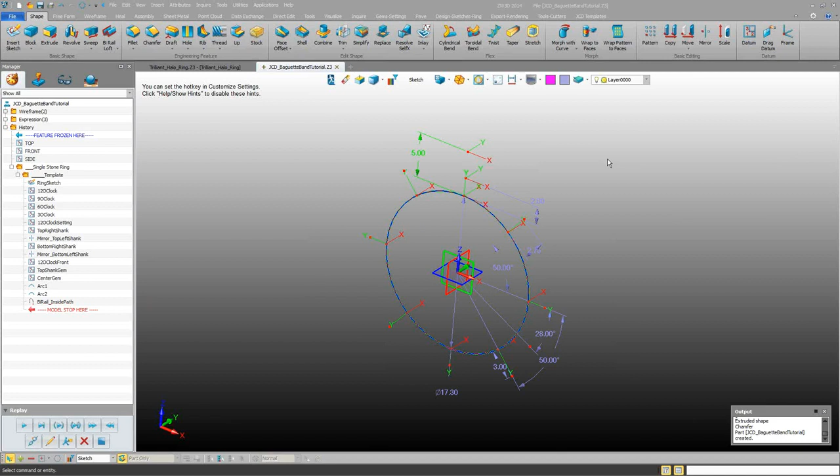All right, basic band, basic eternity band. Design sketches ring. The fellow that needs help is looking for a comfort fit and just a basic square shank like this with a comfort fit.

So since it's an eternity and it's the same thickness all the way around, we only need it at the top. I'm going to right-click on the sketch and edit.

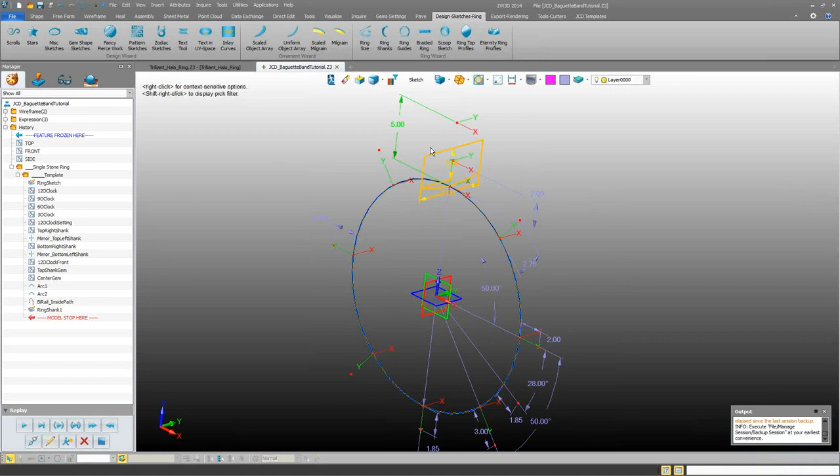Now, this part here, you come in and you manipulate it the way you like. He would like a 3 millimeter wide baguette, so I'm going to make this 4 millimeters, so we have a little bit more than a half on each side.

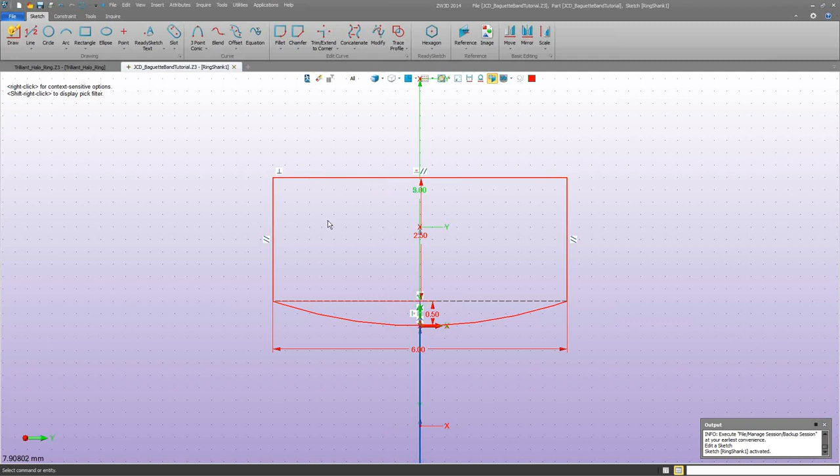We'll build it and then pull the surface over the top just a little bit. So, right-click, modify, 4 millimeters.

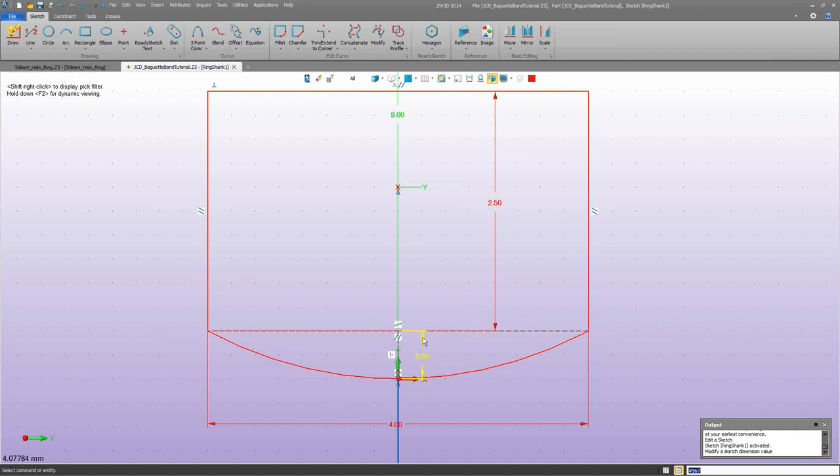Whatever your height is, when you have comfort fits, zoom in and pay attention to this bottom dimension. This is all a part of your height from the finger. So we got 2.5 plus a half, so we're at 3 millimeters high, which is pretty thick.

Okay, I'm going to knock this down to 1.5. Okay, so now we're at a total of 2 thick.

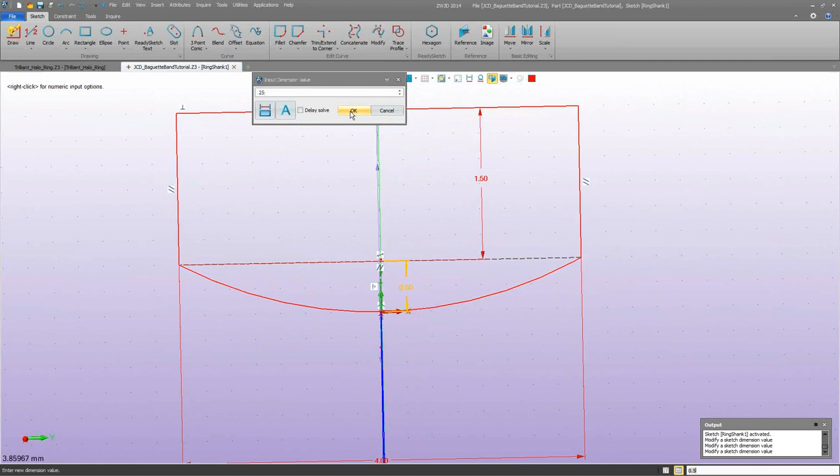If your comfort fit's too intense, you want to make it a little bit harder, right-click, modify it, knock it down to a quarter. Again, you can build rough in the beginning, crude, and then come in and fine-tune it afterwards.

I'm going to leave it at 2 millimeters by 4. I'm going to right-click, exit the sketch, shape, revolve. I'm going to set up my axis right away.

It's the y-axis, revolve type. It's really not too important if it's two-sided or one-sided. One-sided, you just don't have to put anything in here. Since it's closed, I like to have no end caps right here.

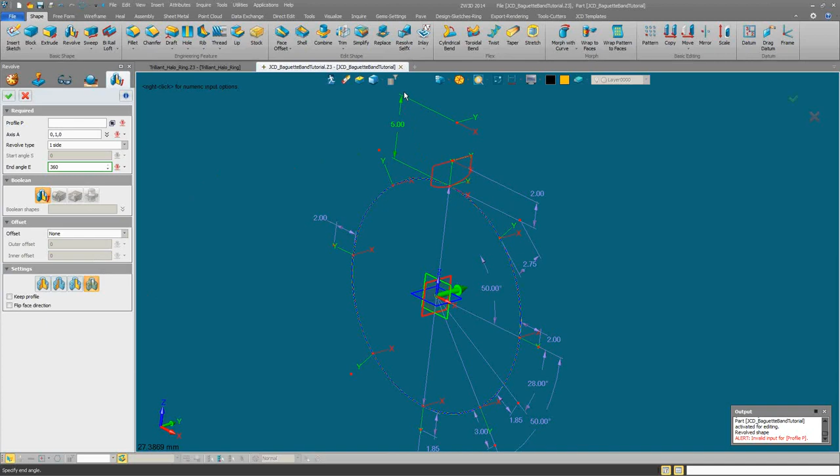Okay, so I'm going to go in and pick my sketch. Notice it's allowing me to directly edit this, but I'm just going to come in and type in 360.

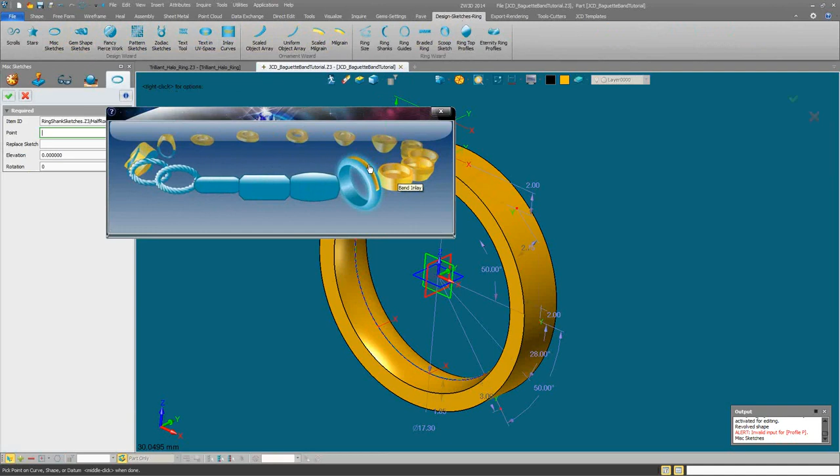Okay, so here is a basic band, all right? I'm going to go into my Design Sketches ring, Miscellaneous Sketches, and I'm going to back it up over here, and I'm going to pick this band inlay, since it's symmetrical all the way around. And I'm going to put it on the front view plane.

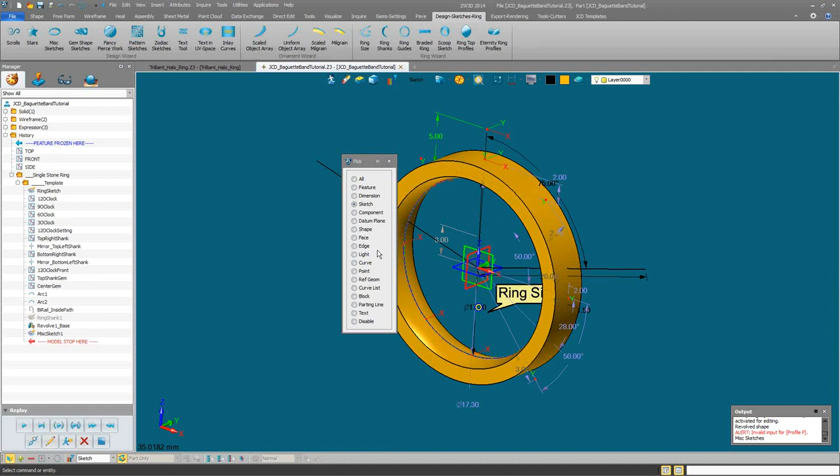Okay? You want to come into this sketch, and we can play with this. I'll show you what you can do so you can put more or less baguettes at any time, and there's just a lot of different things we can do with this. I'll go through a few strategies here.

But for the moment, I want this ring size to match that over there, and it is. Okay, that's not a problem.

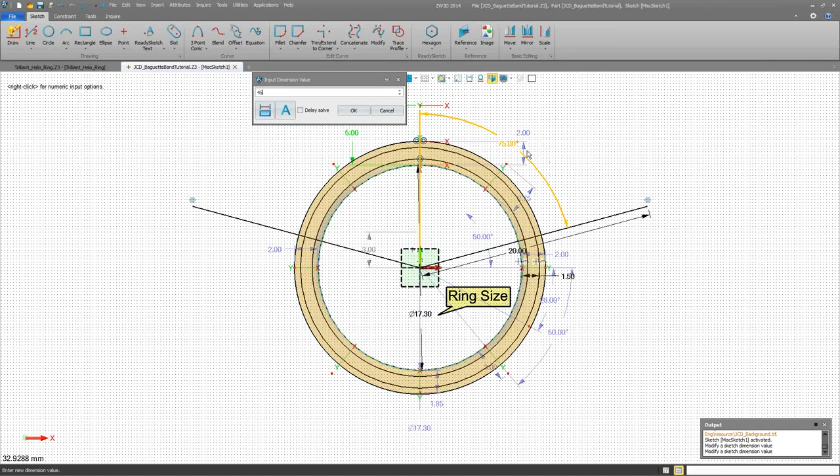Now this dimension here will tell us how many baguettes, how far around do you want these baguettes to go. I'm going to come in here and for the moment set it up for 45. Always keeping in mind that this can be modified and all these changes will follow along with us.

Sorry, I made a mistake. Want to go back in there, and I want to trace this profile right here. That's it, just that.

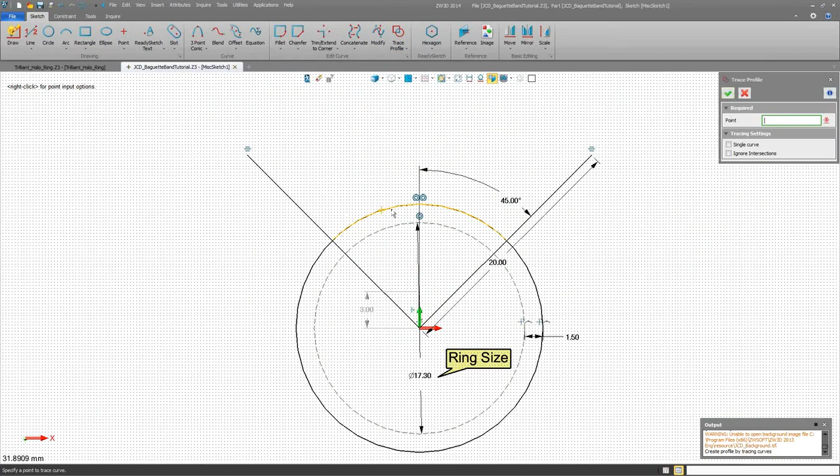And OK to command. Okay, so when we leave the sketch and we create a feature off of this, it's only going to recognize the blue area. So I want 3 millimeters. I'll put my end at 1.5.

My direction will be naturally along the y-axis. I want it to be closed. And I'm going to thicken this.

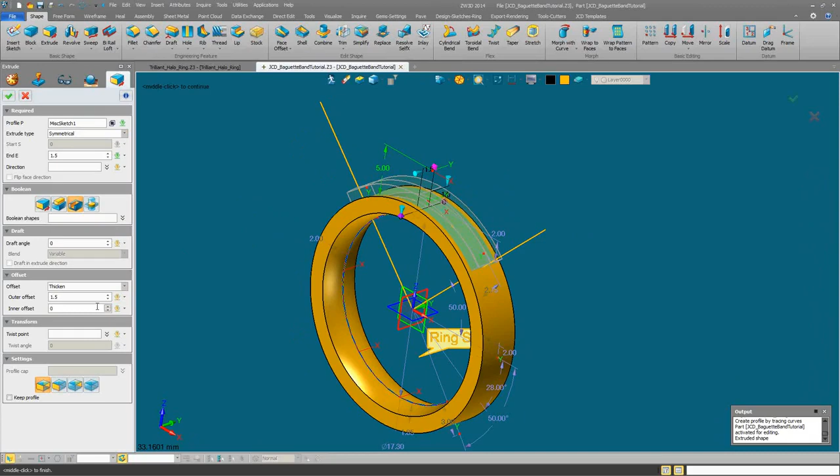First, let's bring it in. And let's set it up to cut. Okay, you could do a quick inlay like that, but in this case, we don't want to do an inlay. We want to cut all the way through.

Okay, so now, like this, we got a 1.5 millimeter on each side. And we'll approve the command.

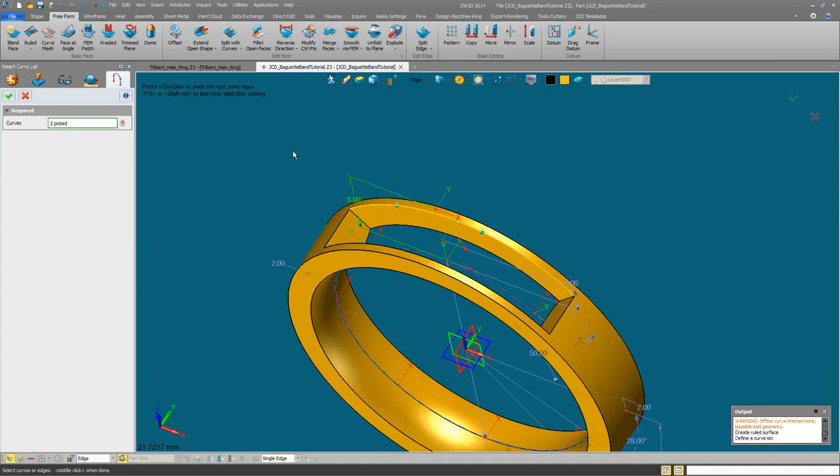I'm going to put in a quick guide surface, ruled, from edge to edge. Okay, being that our seam is at the top, I'm going to do a right-click, insert curve list for one side, and right-click, insert curve list for the other, because I want them picked as one. I'll reverse this face.

And let's come in with our baguettes between two curves. That's not important. Now, on this tool, you have to pay attention. It wants to pick two A curves. Don't let it. Let's come in here, see if it grabs the entire edge.

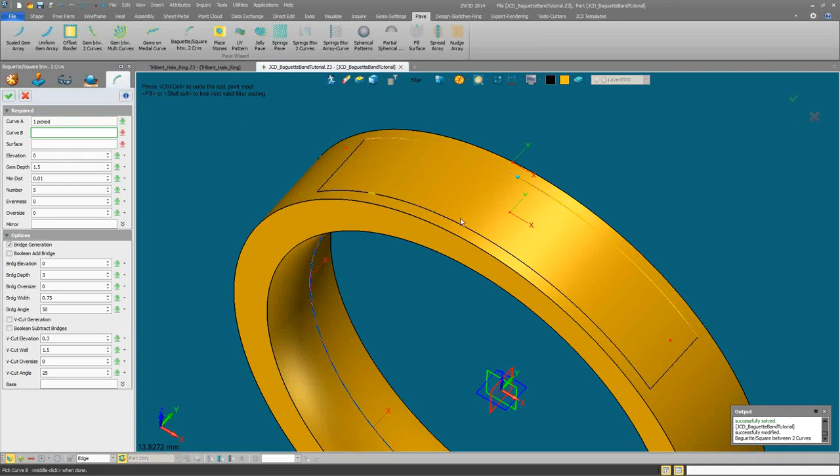Right there, 1, middle click, 2, middle click, surface. Okay, it's defaulting to 5 pieces. There's 7.

Okay, now, gem depth, I'm going to make it a little bit smaller. Let's come into about 1.25. Let's see what it looks like.

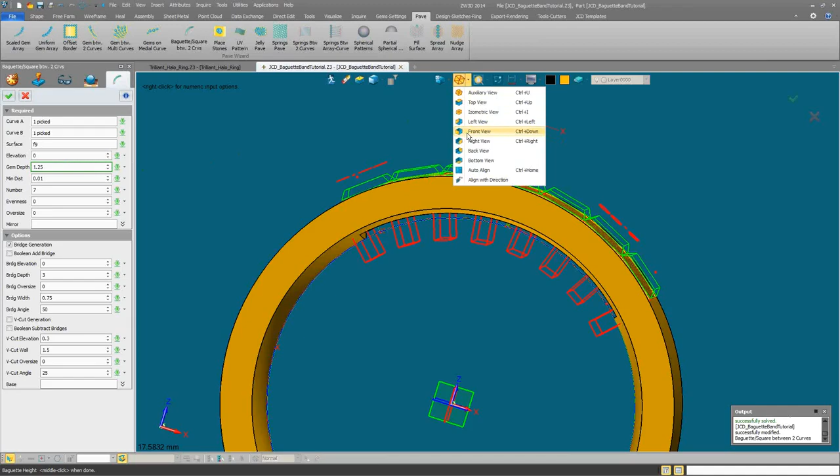Okay, we're going to knock this down on our elevation. We're going to bring our bridge down further. We'll change our bridge width.

You guys use your own judgment on this. And the bridge angle, you can kick up your step size to 1 or 0.1 on these here.

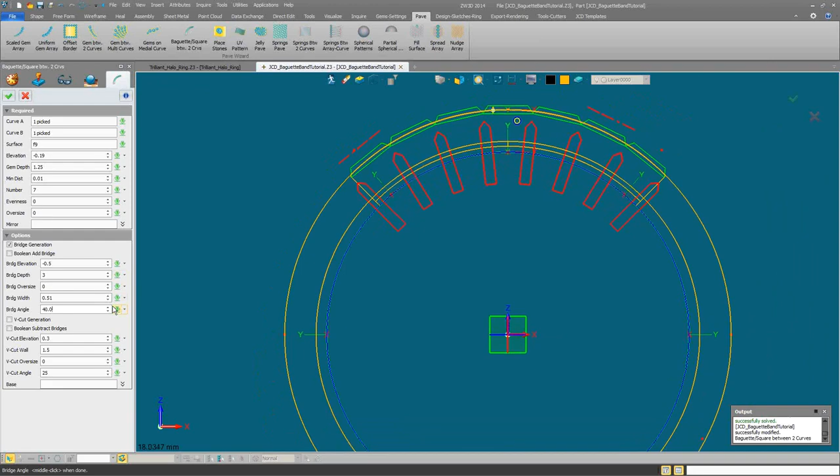I'm going to go a clean 40. And let's see, we don't have to go 3 here, I'll just come down to 2. And our gems, let's come down a little bit lower.

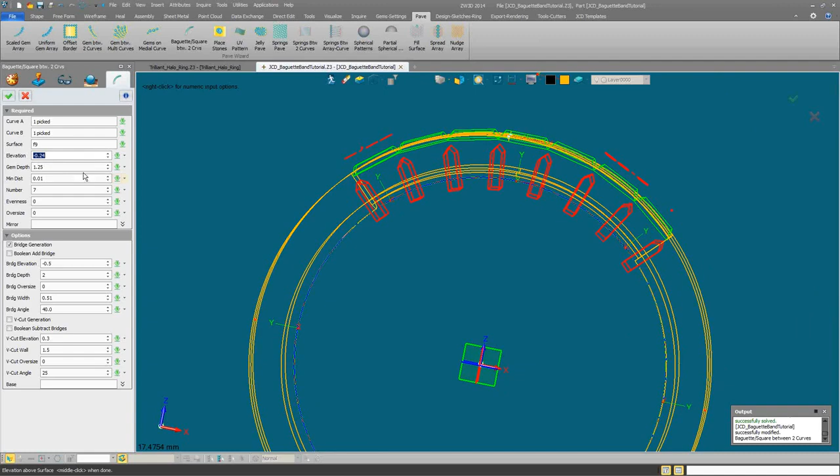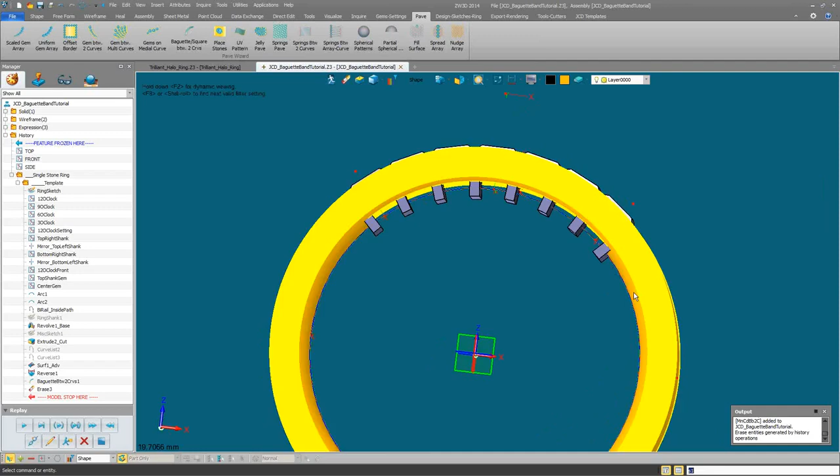All right, so since this is a comfort fit, we can't come in and just clean out the shank. It'll look ugly in there. Let's get rid of this top surface. We want these to be trimmed to follow the contour of the comfort fit. So we'll go to wireframe, intersection curve, and we want face datum.

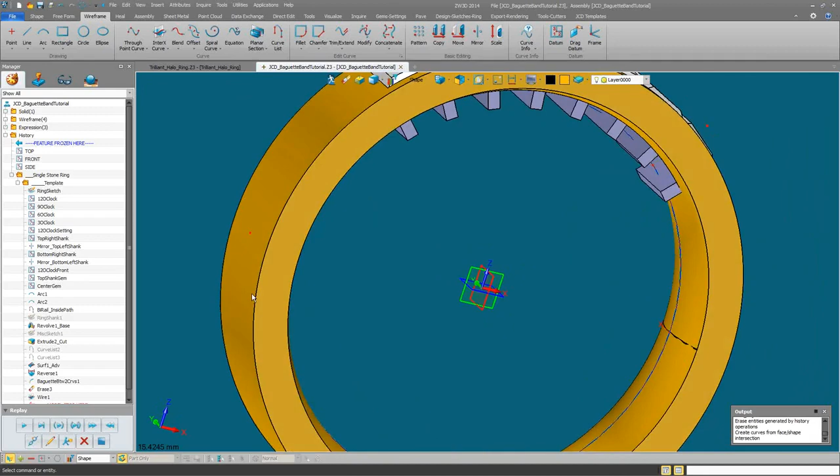Our first shape is this face. Our second shape is this top-down datum. So we get these curves. We don't need them on both sides, we'll just use one. We'll extend these, both sides, and I'll extend them linear. And I want to extend the curve, not the edge. And revolve it along the y-axis.

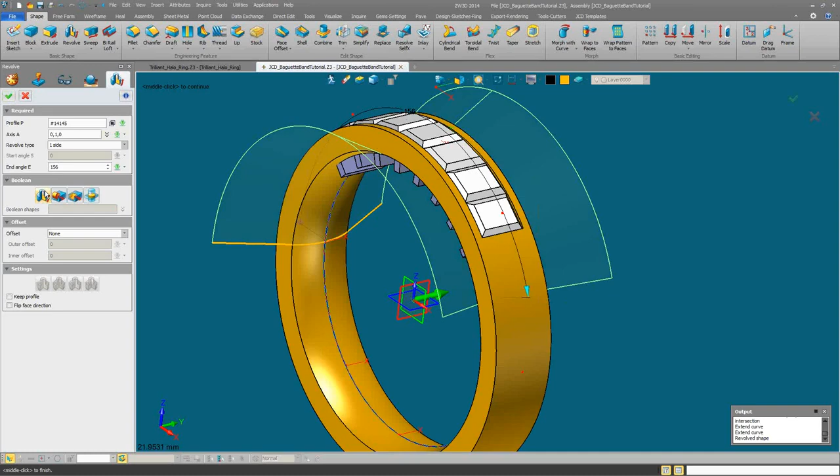You could test it and see if it does a trim for you. Okay, it's not going to because these come in as components. So I'll set it up as a base. And I'm going to take these components, shift right click, left click on each one of these, right click, merge. And now I'll trim these shapes. Holding down did a shift right click first.

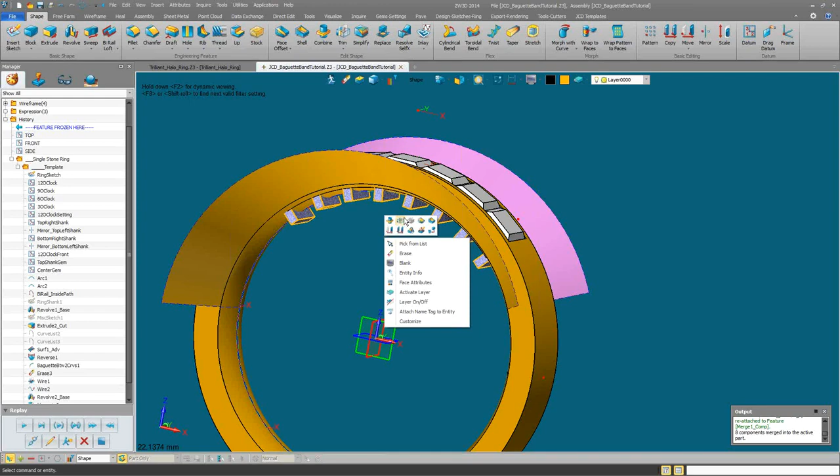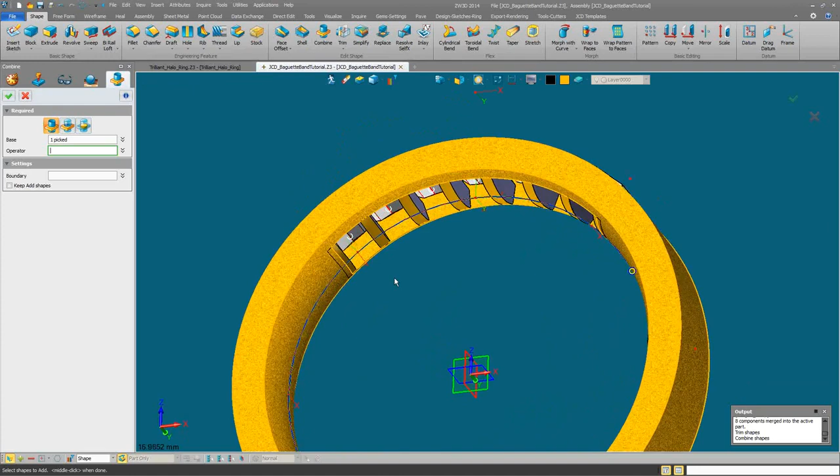And now since they're all selected, I'll do a right-click trim, and I'll trim with this surface. And now I'm going to flip side to keep, and we don't need to keep that surface. So now it follows the contour of the inside of the ring. Right-click, let's Boolean add. There you go.

Okay, we'll blank out the shank so you can see what's inside for your setters. You have a nice little bridge in here. If you want to make it lower, you can do it in history. You want to make a groove, you can do that. You want to bring this over more, you can, put the wall over a little bit more, whatever you prefer. It's all set up. I'm just going to undo that.

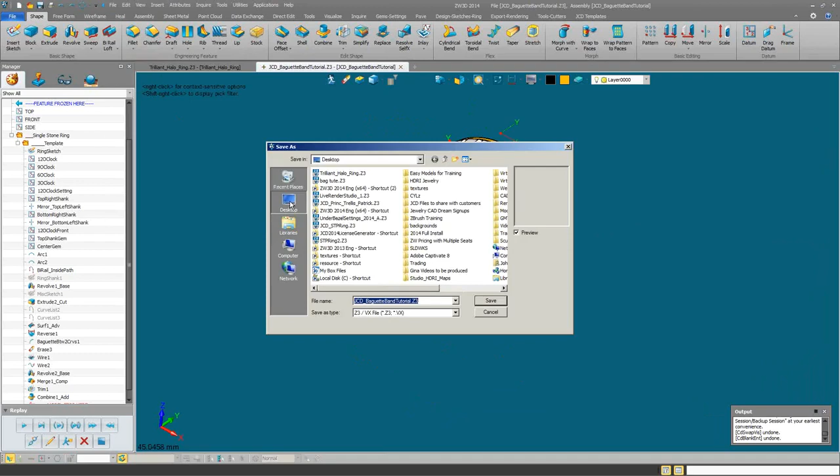All right, so we have this 7-stone band. That's 3 millimeters in length. What if you had this in stock, okay? And you have a customer comes in and they're maybe bigger or smaller, want more or less baguettes, or want the same baguettes and a little bit narrower. You have all the components here to do that. You don't have to rebuild.

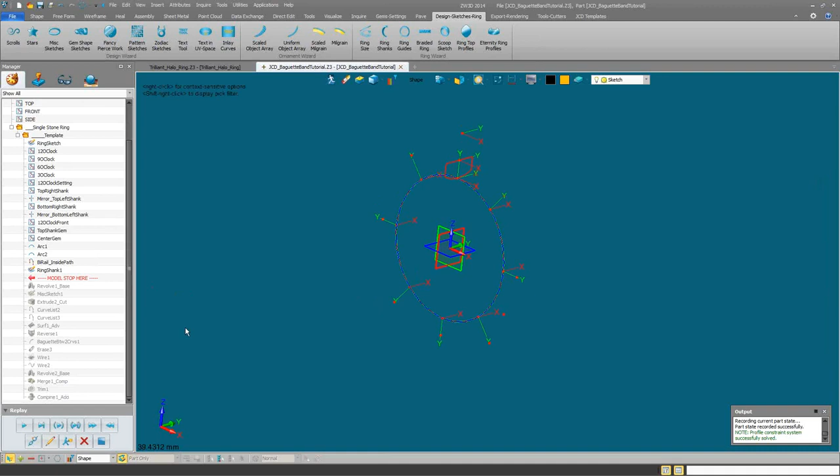So, well, let's see. Let's say we come into the ring size J. All right? And we want the stones to be narrower. Come in the sketch, knock it down. Play with it at 40. Exit.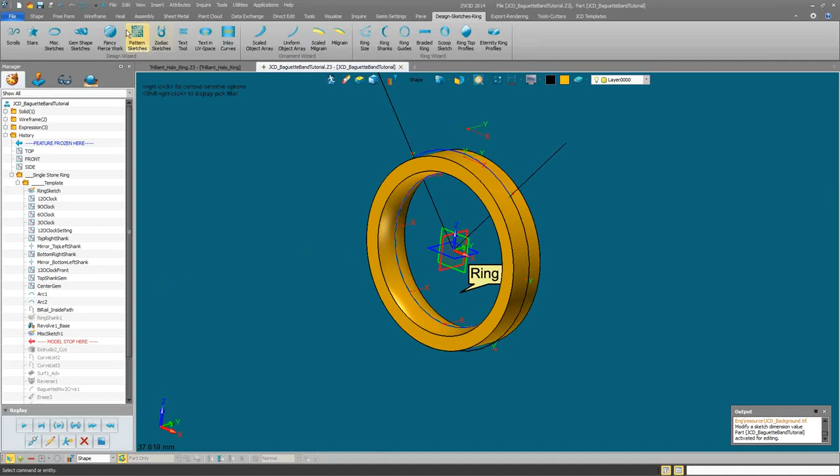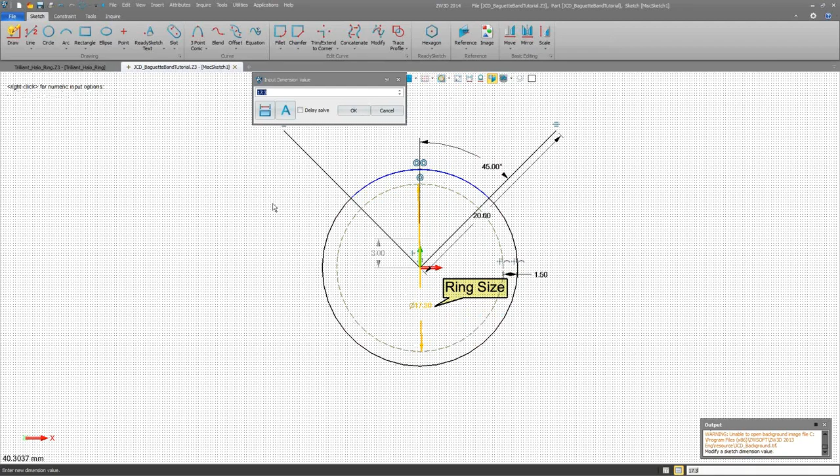Aha, I forgot something. We want this number to be the same as this ring sketch number, 15.6. Again, this is going to be a tool, but it's best to know how to handle these things from scratch. This way you'll become very good at the program.

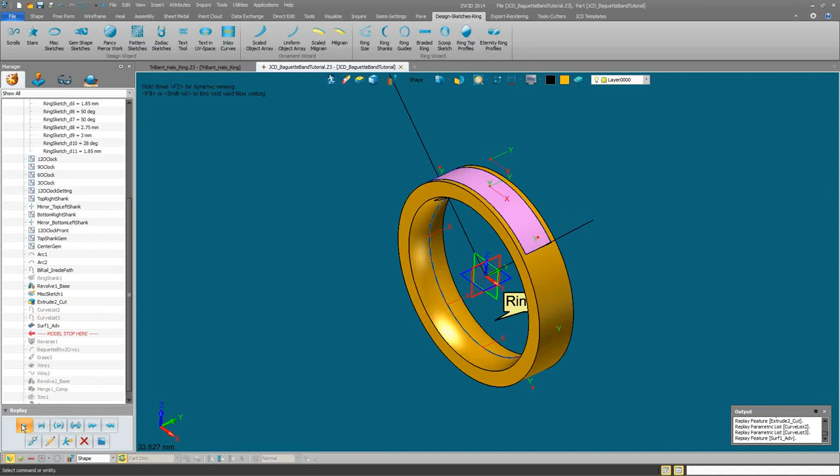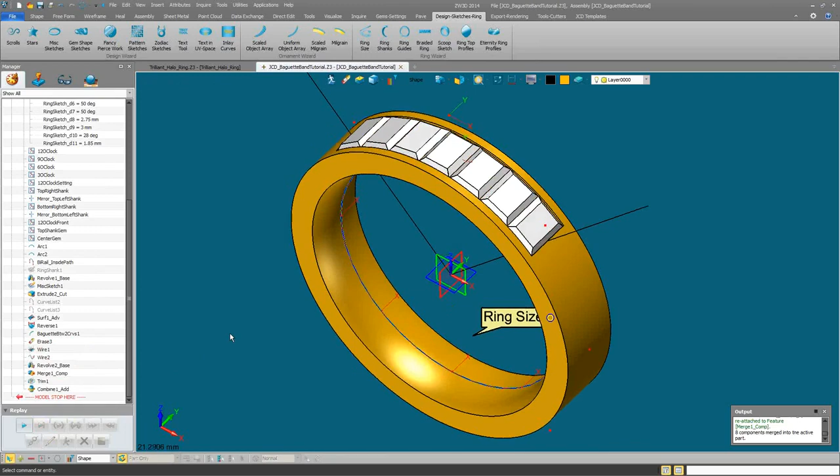Okay, so you can just come in and play and then edit. See, it's following the last curve, right? You got 3 stones. 3 millimeter stones. I forgot to come in and make it narrower. So let me come in and modify this sketch again. Go 40.

Okay, so notice it's inside more. You have no choice. The stones are going to be narrower. There you go. I don't know if you see it, but these have been automatically made narrower on the width. Okay, so everything is here to make changes. There'll probably be something like this, where you can come in and change your profiles.

Okay, so far, any questions? Text them to me, any questions. It doesn't have to even pertain to this model. My main intention for this meeting is to take questions for rough spots you guys are running into. It's not necessarily to build models. We're going to build a lot of models, a lot of basic models, so you can dig in and do them step by step. So this is the time to talk about issues that you're running into with the program, software, modeling, whatever it is.

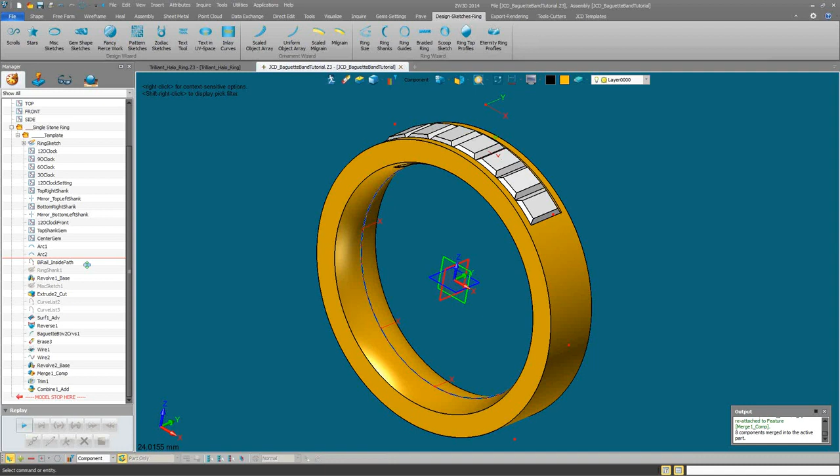All right, what if we wanted to go on around more and add more stones? Let's do it. On top of it, let's come in and let's make this much bigger. Okay? So, let's go to our ring sizer. And let's make it a size 10, 19.7. Okay?

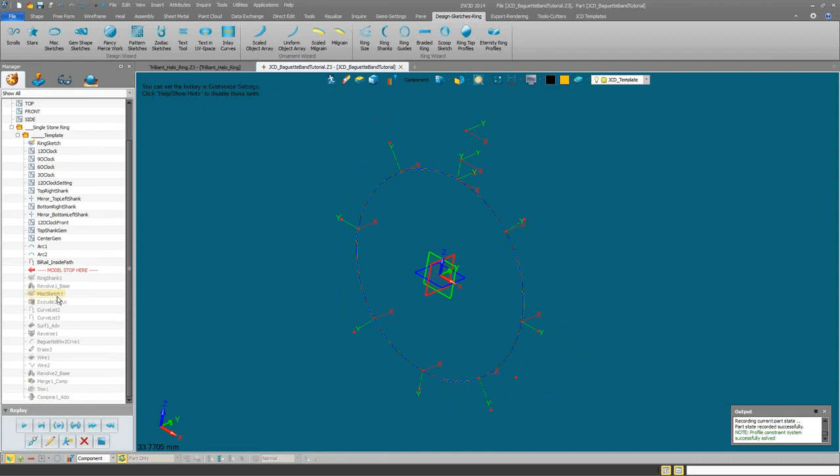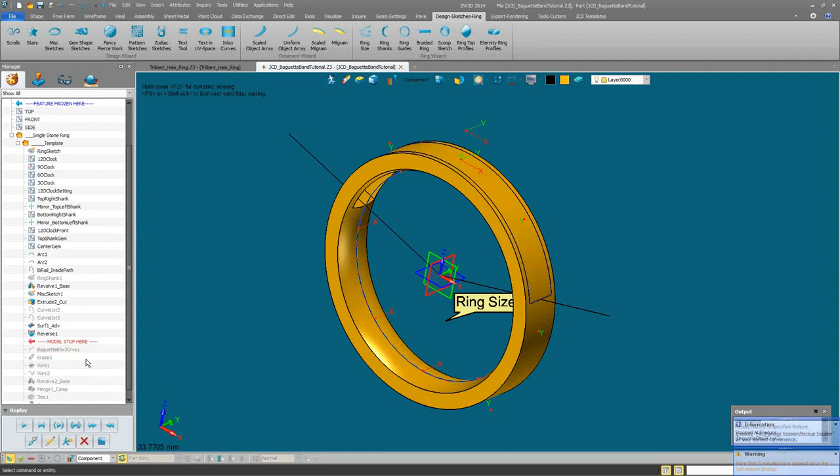Let's continue to this sketch and edit. Let's right-click, modify this, 19.7. Let's come in here and let's open this up to, let's say, 75. Okay, so now we're going to have baguettes coming all the way around. Okay, but now we got to continue, right-click, continue to this command and edit this command because we don't want 7 anymore. You can put them in this way, but you may want to kick it up and put in 20 pieces.

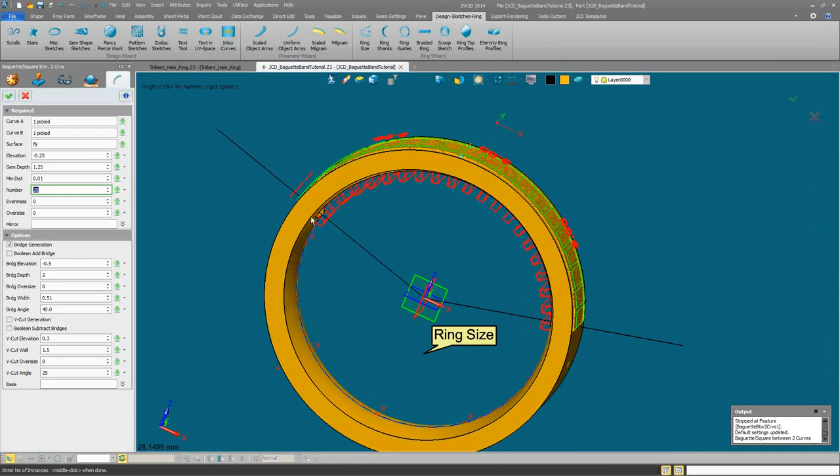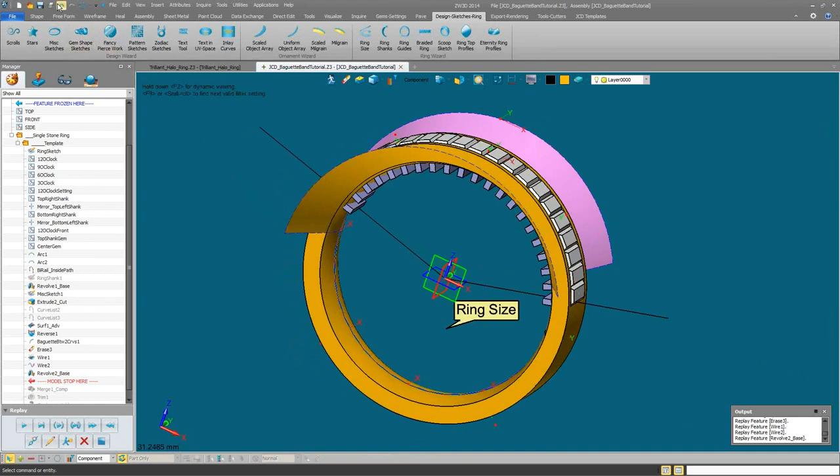Okay, so what's going to happen here is because we have more pieces, we're going to have more components that need to be adjusted. We'll work it out. Okay, so we're coming in, erasing that surface, it's automatic, and bringing in our wire, extending it, revolving it. Notice it's not going all the way this time, right? Let's just undo that revolve and edit. And let's just drag it around.

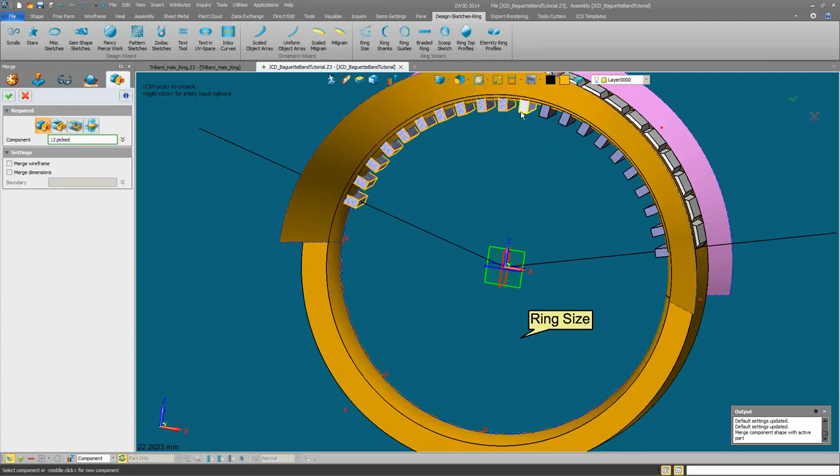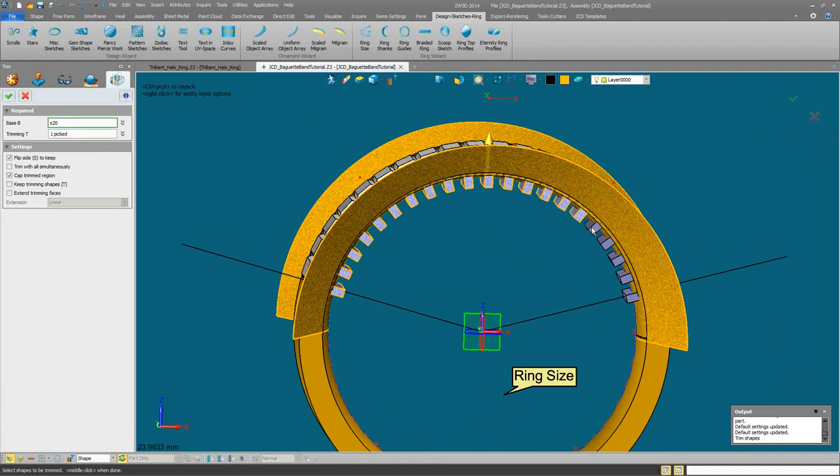Okay, now we're going to merge components, but we have more. I want to be careful. I'm going to press this pencil. Look at what happened. It grabbed the 7 because it's recognizing 7 or 8. I'm going to unpick all, and I want to pick in here. And OK to command. And now I also want to trim and add to this here. And we'll add them.

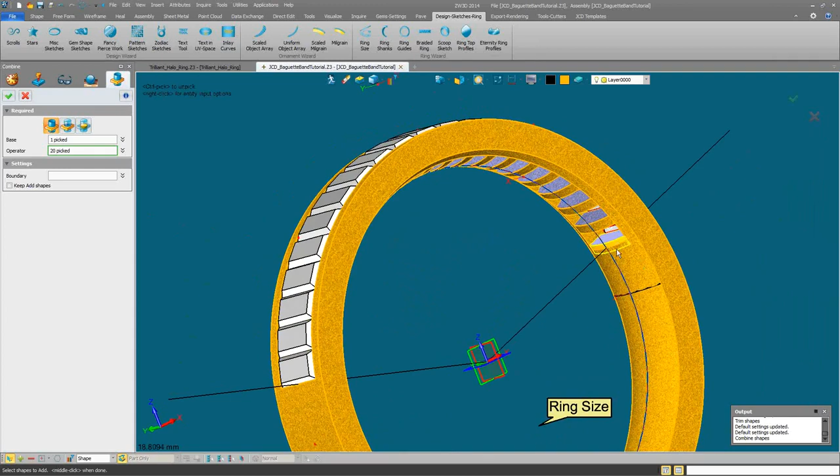See how it goes. All right. Make it all one color.

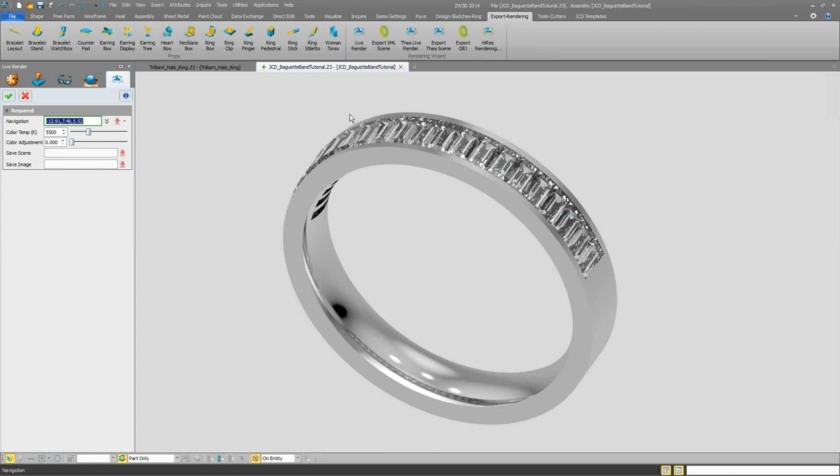We're working on some dynamic rendering. I typically should bring in a studio, but here we're going to have live rendering. With the studio, it comes out nicer, and then there's two choices. For the people who purchase Thea, actually, you can get a pretty good image with Thea live. Again, this is without the studio, so it doesn't show up as good. But it's live rendering. You could come in, move it around, and it'll automatically render again for you.

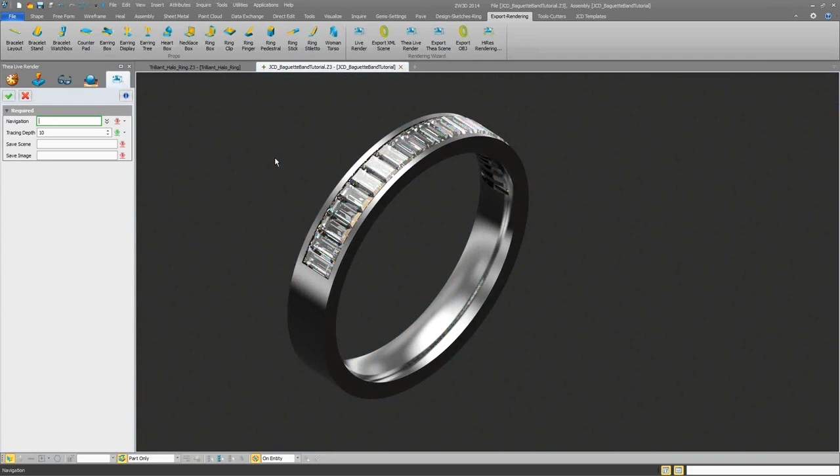Okay. All right, any other questions?

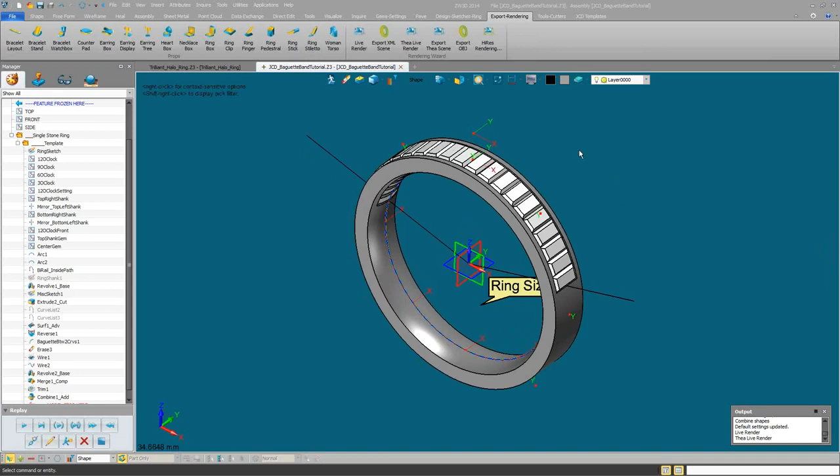What I'm going to do, since I forgot to record in the beginning when I was doing the trilliant, is I'm going to bring it up again. From scratch. Okay, and I'm going to move a little bit faster. All right, so we'll do two ways to make a trilliant halo given what we have on this screen.

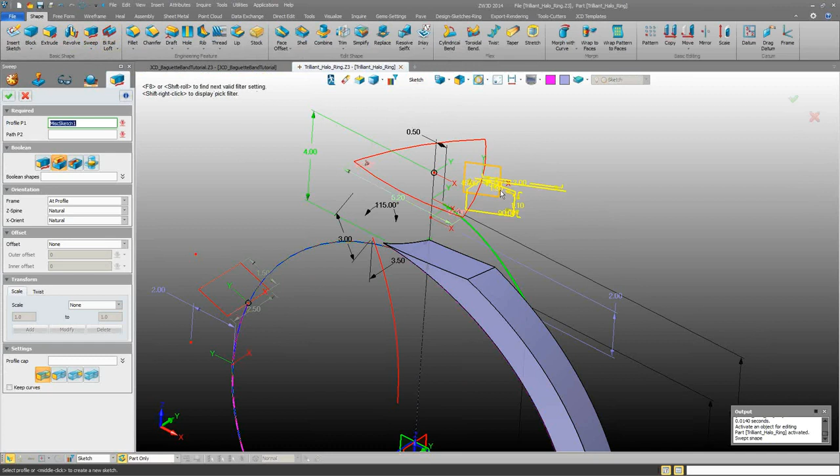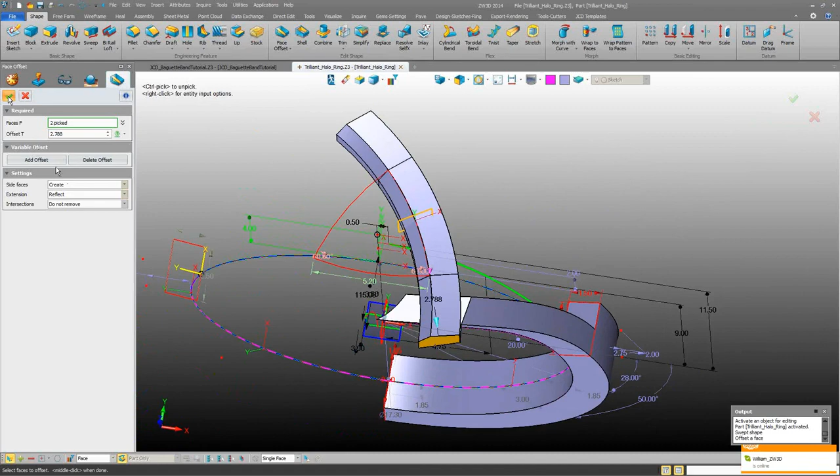Shape, sweep, sketch, curve on that. Set it up as a base. Face offset. Both sides. Extend it out. And reflect is good. If you want linear, do linear. Right click, trim. Side view datum. Bingo.

Extend the bottom edge. Both sides. Wrong edge. Right here. Shape. Extrude this curve. We'll do two sides. Right here, I'm just going to make it a little bit smaller.

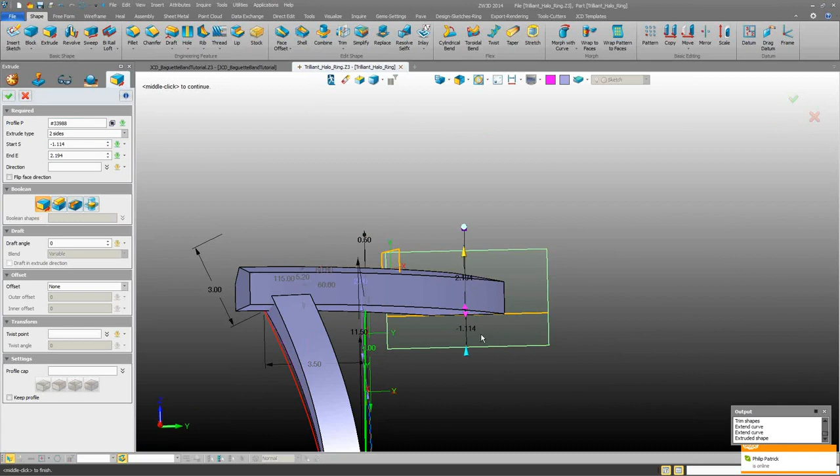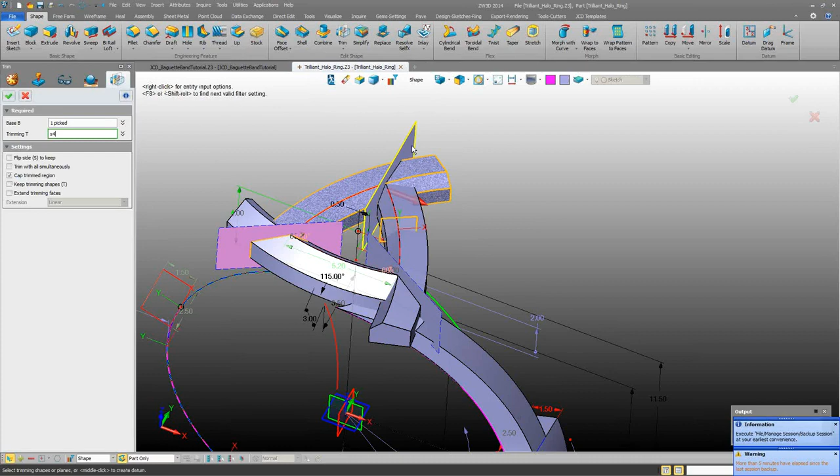OK to command. Copy. 360 divided by 3. 2 copies. Z-axis. Shapes 1 and 2. Entity filter on shape. Right click. Trim. Flip side. Right click. Trim. And I'm going to flip on all of these. Okay.

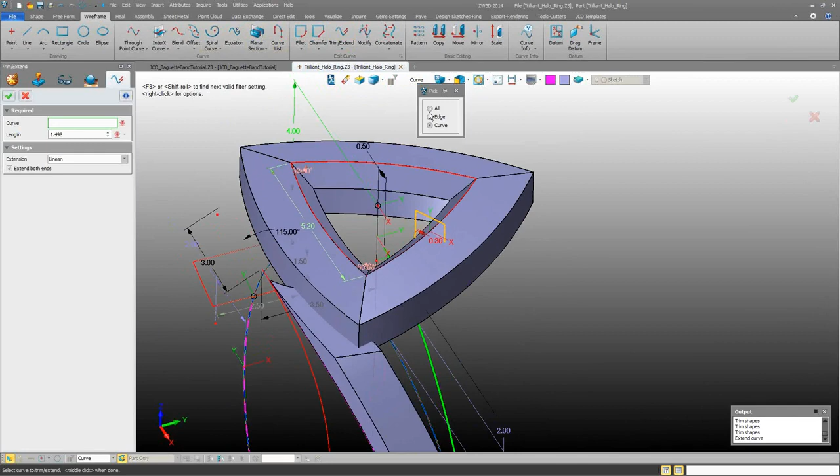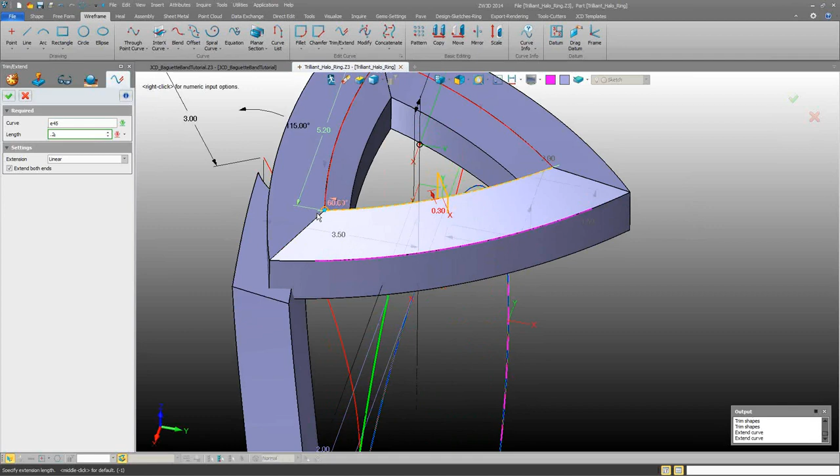Put pave in on the surface. First, I'm going to extend this edge back in a negative direction. In this case, I'm going to come a negative. I'm going to do a -1. And this one here, well, maybe I'll bump this edge up just a hair. See if we can get a little bit more room on this. I'm going to go 0.2 on this and okay it.

And then just come in with our pave, gems between two curves, and I'm no longer going between an edge and a curve. I'm going to go curve to curve. Curve 1, curve 2, and I'll pop it in.

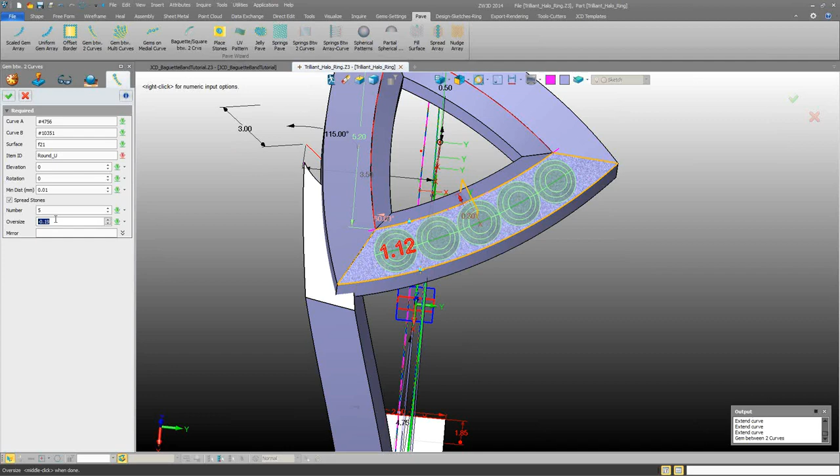Spread the stones. In my oversize, I'm going to right click, go to step size. 0.01 is good. Reduce it down until I could pop another stone in. Bingo. You want to get more space, just kick up your minimum distance. I'm going to leave it at this for now.

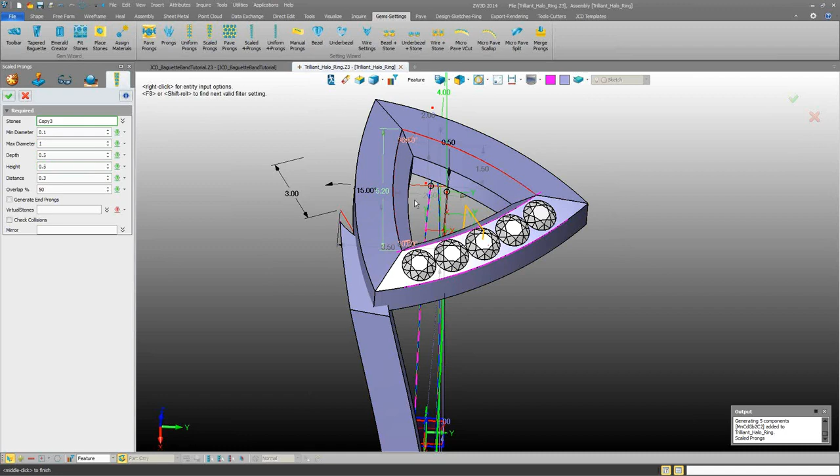Okay. Gem settings. Scaled prongs. Well, we don't want to exceed 1. We'll come down on 0.5 on the depth, 0.5 on the height. We'll do this afterwards. We're going to pick these as a feature. Right click, absolute. And we'll come in. You could swivel these around and play with them as you like.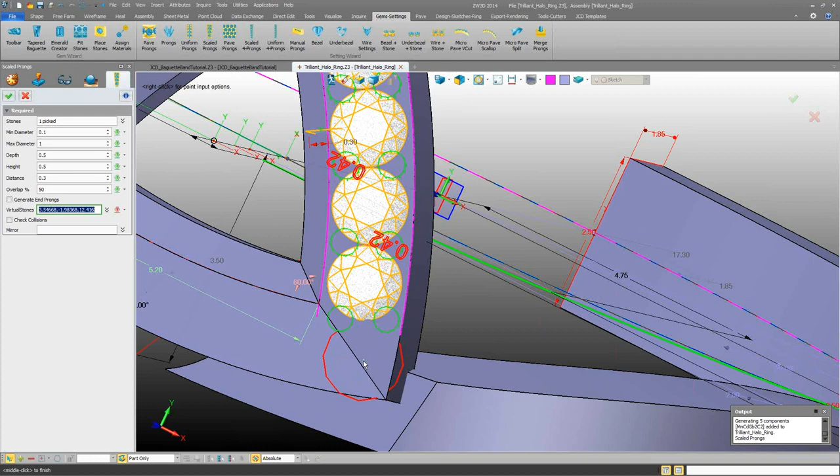Excuse me. You want to come over here? Come over here. Unpick last if you want to do it like that. I prefer not to overlap. Okay, so you just play as you like here. And I'll do the same on the other side. Actually, I don't have to.

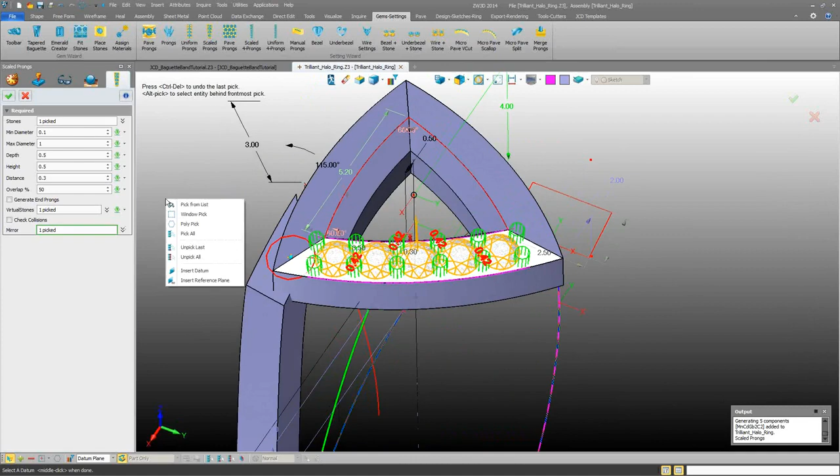We'll mirror across this, Rachel. Okay, use that datum since you have it in there already. Just mirror across there. Well, I'm sorry, unpick last. We don't want to mirror that. This here we're going to put in manually, and we'll mirror the manual beads in. So I'm just going to put something somewhat sloppy in here.

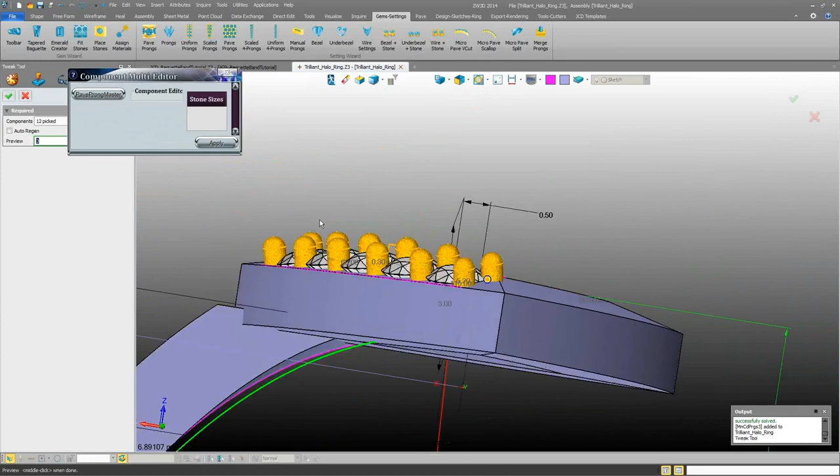And approve the command. Exit this here. Yeah, this here I could have played a little bit different, but I'll leave it at that for now. 0.5, again, depth, height, points. We'll make it a little bit smaller in here. And then a little bit smaller again over here.

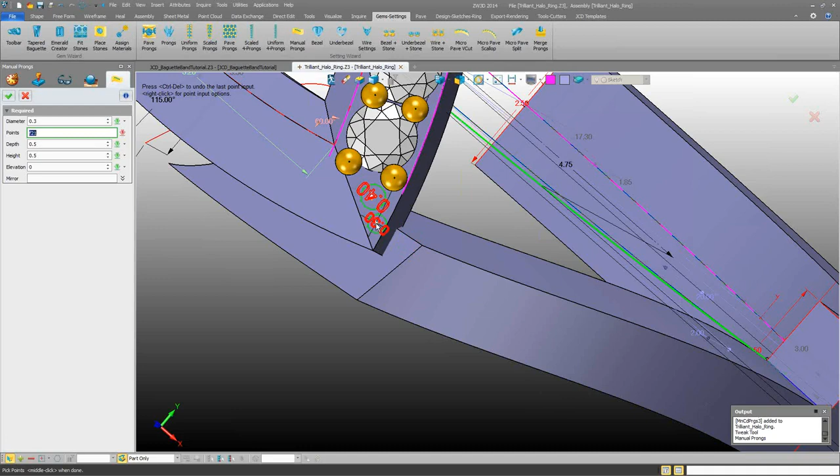And these two we can mirror across this datum, Rachel. Okay, and OK to command. This I would change. Don't want that like that. Do the same on the other side. Play with it as you like.

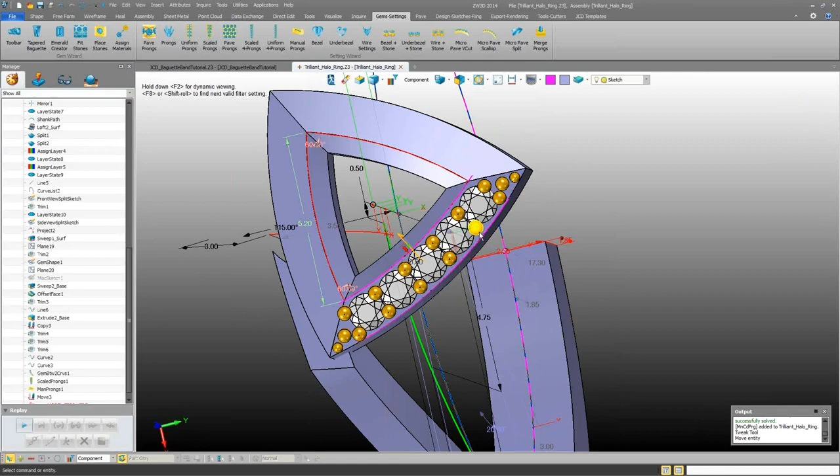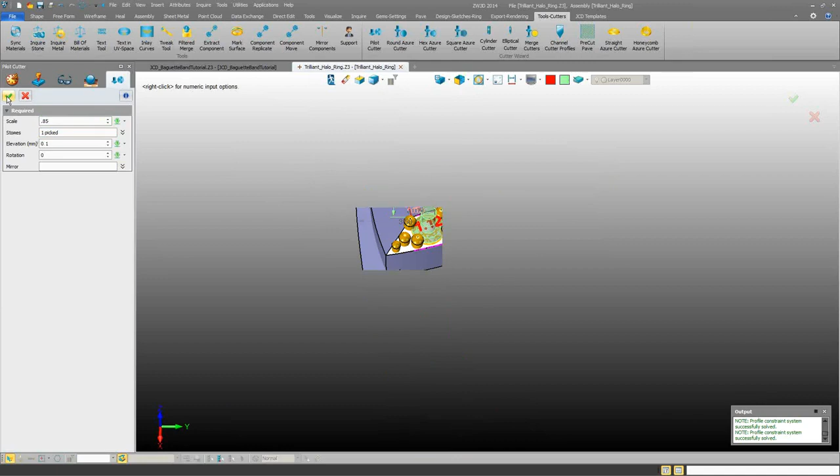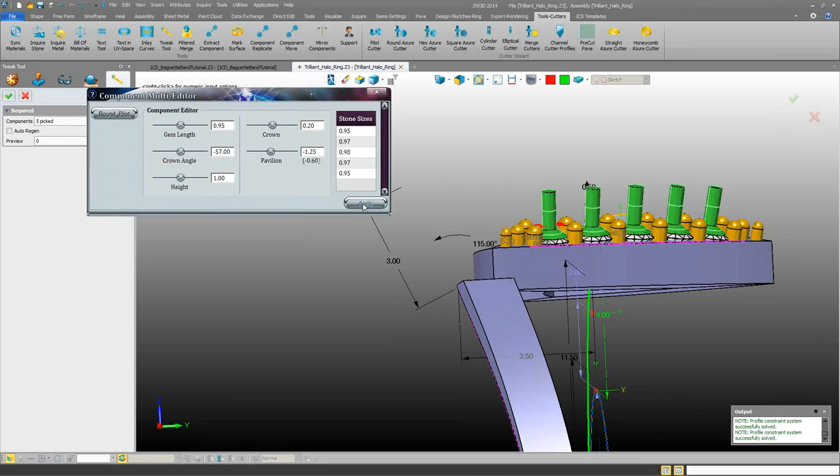Okay, bring in your cutters, pilot, set it up as a feature. And I like to scale mine down about 0.85 or 0.9. Well, I forgot to reduce my height, so let me just come in here and play. First of all, I'll make my depth on the cutter a little bit deeper than 0.6. I'll go 1.25 and apply it. That'll compensate for that distance.

Merge cutters, pick it as a feature, base, here, and that's it. Okay, so that's one way to go, Rachel. The other way is like this.

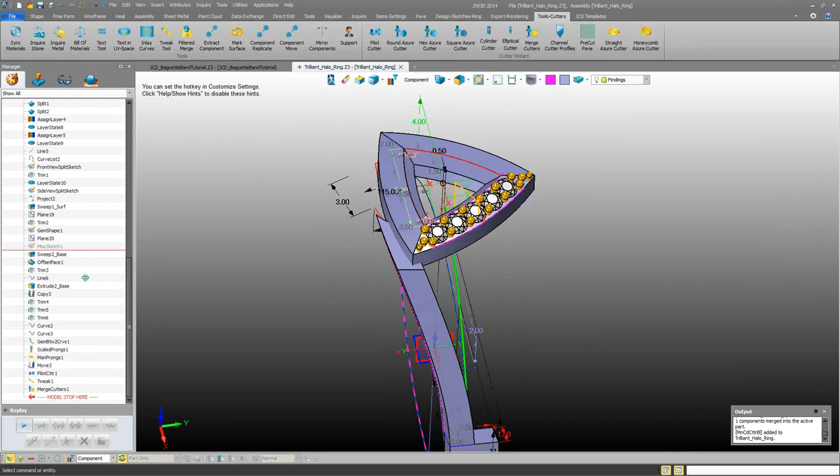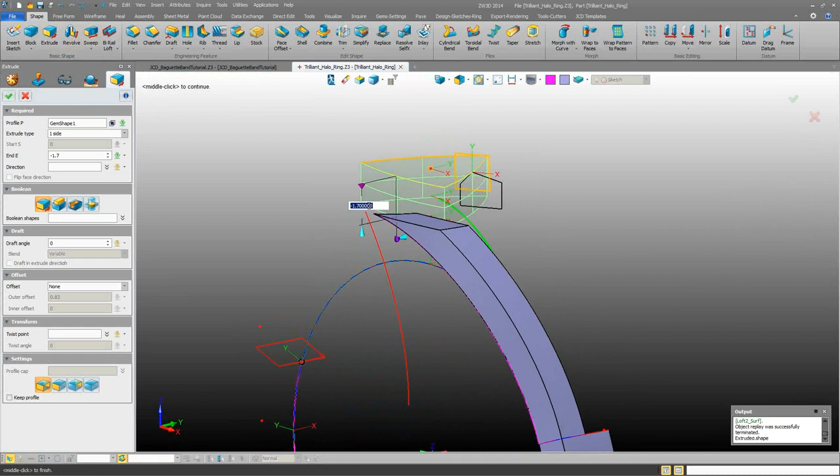Shape, extrude. We're going to pick it as a sketch this time. Middle click, and then we're going to come down. I think you have a negative 1.7, something like that. But I blended. Redefine last.

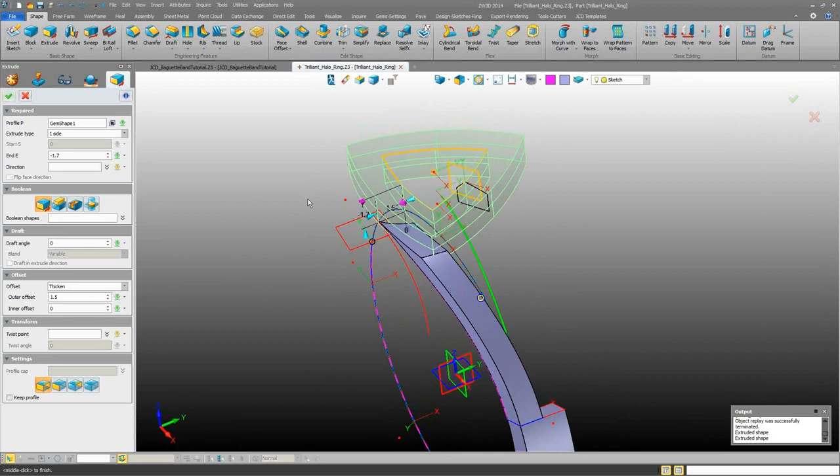Offset, thicken. Okay, so I'm going to come in here, and we're going to kick it out. 1.5. I don't know exactly what you need on your width here, but you can play with it and see for yourself how far you want to go. I'll leave it at 1.5 for now.

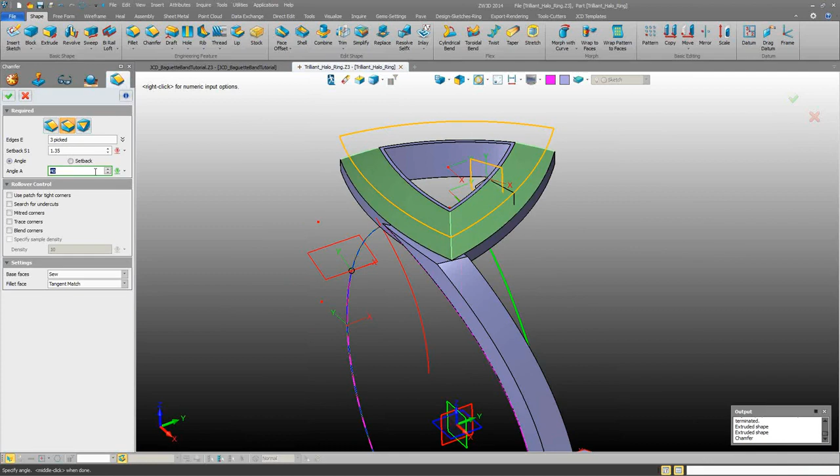Come in with an asymmetrical chamfer. And again, remember, edge first, top face. Edge first, top face. Okay, so it's an edge and a top face. And then you can play with your angle over here, however you like. Okay, so that's the second strategy, right? Two strategies.

All right, any questions? Any other questions?